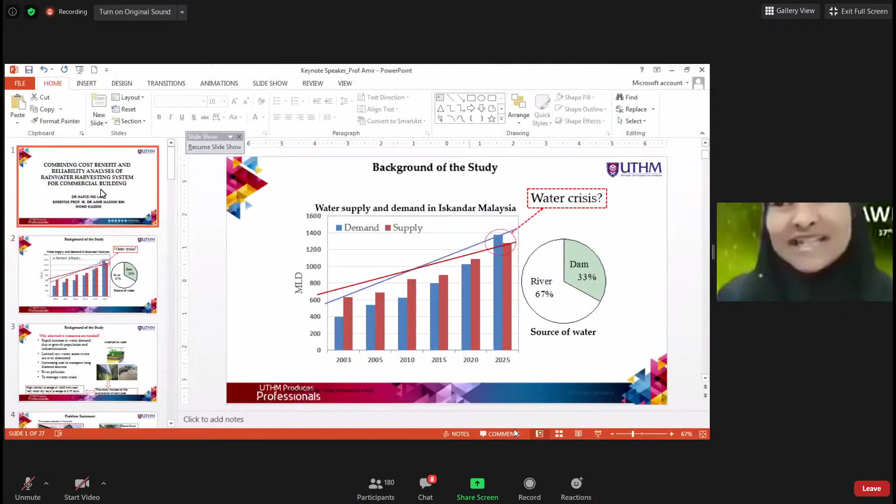Members of the seminar, I would like to bring your attention to our final speaker, coming all the way down from Johor, Malaysia, introducing Professor Insinyur Dr. Amir Hashim Muhammad Kassim from Universiti Tun Hussein Onn Malaysia. Professor Insinyur Dr. Amir Hashim worked as a professor at Universiti Tun Hussein Onn Malaysia, Department of Water and Environmental Engineering. He earned his PhD in hydrology and water resources from the University of Birmingham, and his Master of Science in Hydrology and Water Resources from Colorado State University.

Professor Insinyur Dr. Amir's research interests are in flood control, rainfall runoff modeling, and also grey water quantification. With that, I welcome

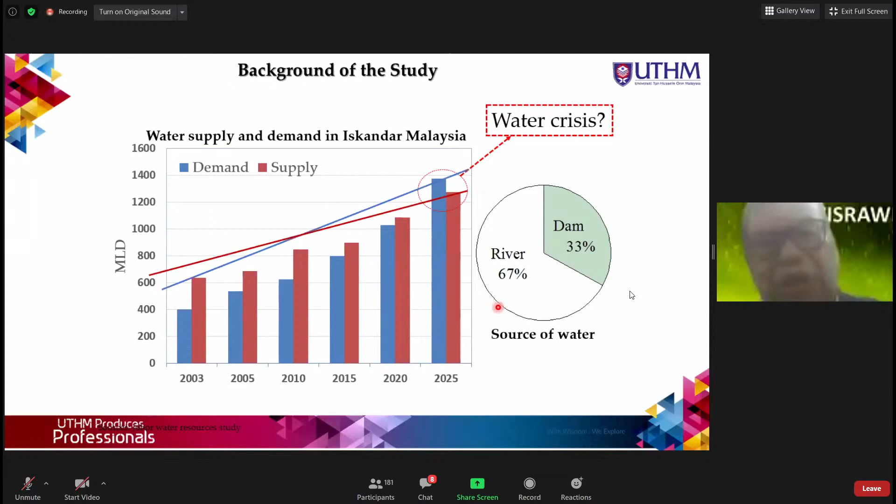Why are alternative resources required? Because of the rapid increase in water demand due to population growth and industrialization. In Johor, especially Iskandar, the population growth is quite rapid. And we have limited raw water. Some rivers are over-extracted, and there are increasing costs to transport from long-distance sources. River pollution is quite common here in Malaysia, and also we need to manage water crisis. So this study focused on exploration of rainwater. This is the alternative that we have.

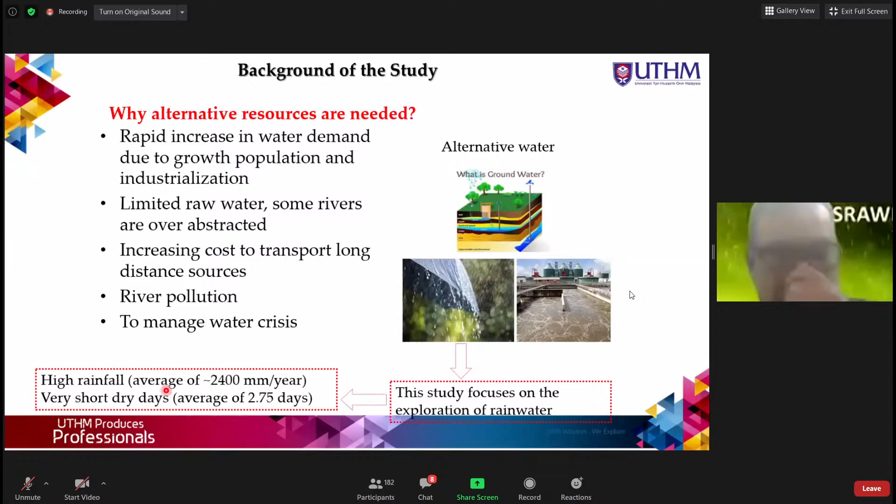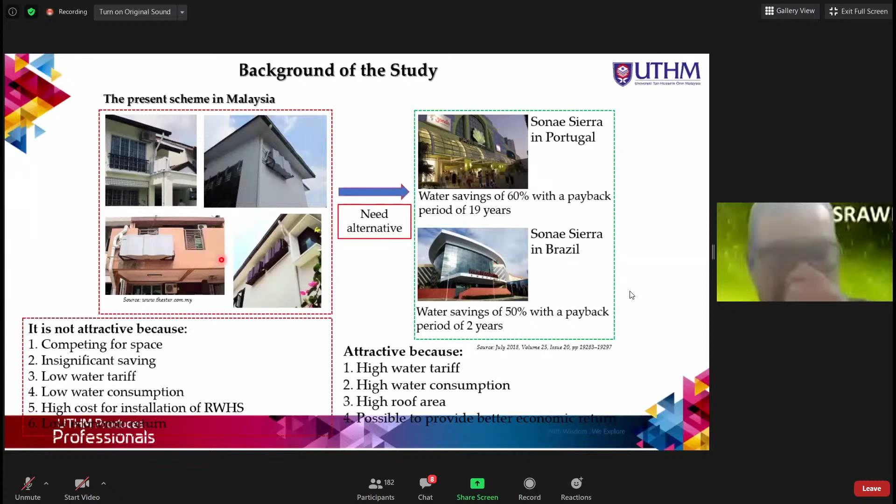We are quite fortunate to have plentiful rainfall compared to other water resources. Our rainfall is high, an average of 2,400 millimeters per year, and we have very short dry spells, about 2.75 days. In the present scheme in Malaysia, we do have rainwater harvesting, but it is not widely practiced, and it's not attractive because we are competing for space. The savings are insignificant. Our water tariff is quite low, water consumption is low, and the installation of rainwater harvesting is quite costly.

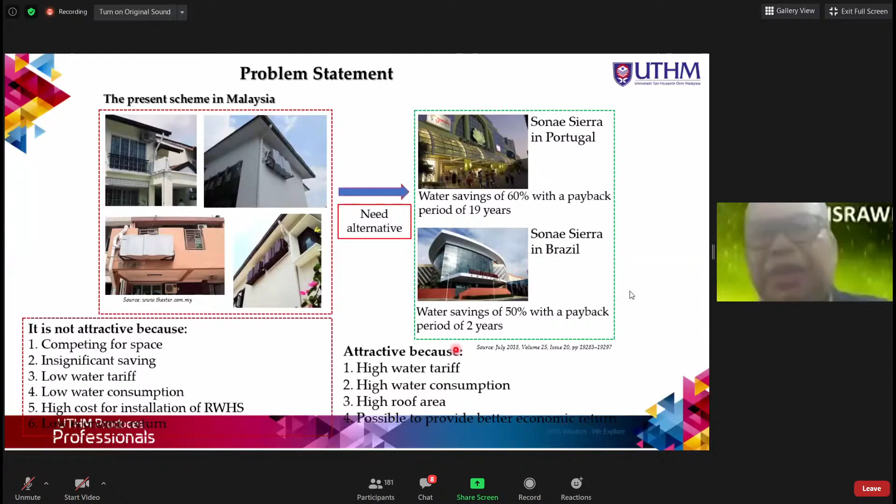But in other countries, it is quite attractive because they have high water tariffs, high water consumption, high roof area, and it is possible to provide better economic return. So with all these problem statements, the main objective is to evaluate the performance of rainwater harvesting for small and large commercial buildings by assessing its supply reliability and economic benefits. Before this we had 4 objectives, which included development of software, but in our seminar today I will just mention 3 objectives.

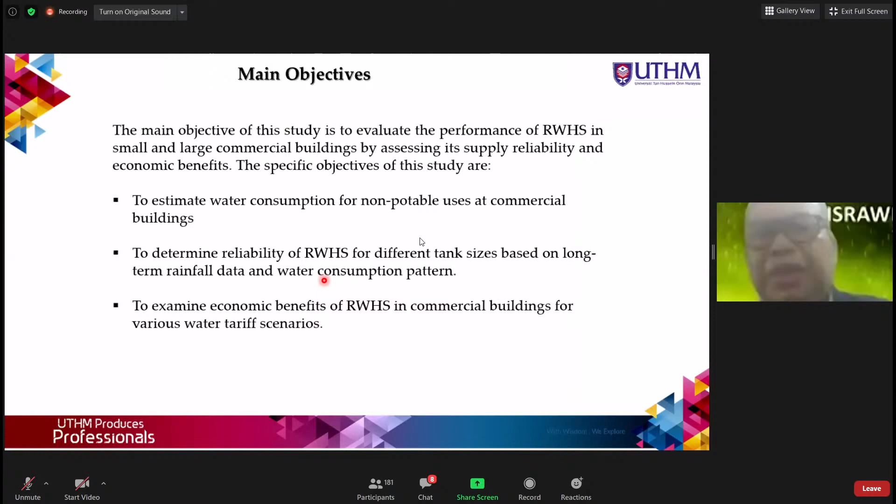Number 1 is to estimate water consumption for non-potable uses at commercial buildings. Number 2, to determine reliability of rainwater harvesting systems for different tank sizes based on long-term rainfall data and water consumption pattern, and to examine economic benefits of rainwater harvesting in commercial buildings for various water tariff scenarios.

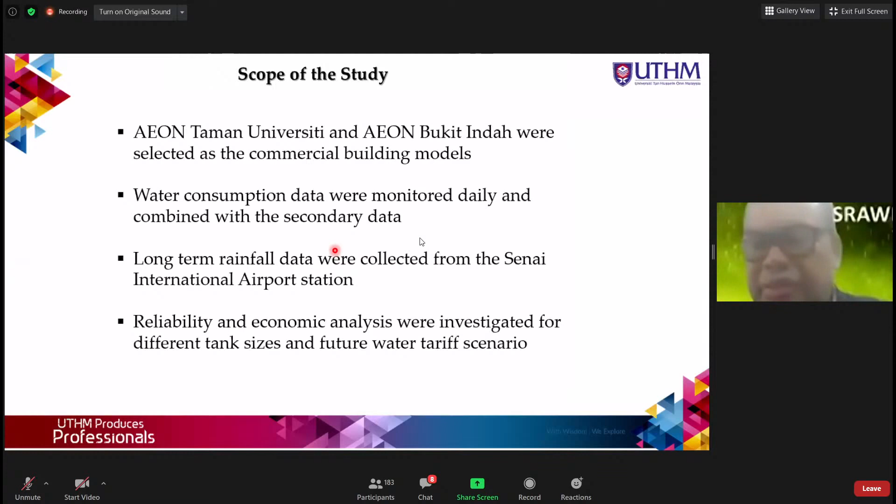Two buildings in Johor Bahru, Taman Universiti AEON, which we consider a small building, and AEON Bukit Indah, which we assume as a big building, are selected as the commercial building models. Water consumption data were monitored daily and combined with secondary data, and we obtained long-term rainfall data from the Senai International Airport station. Reliability and economic analysis were investigated for different tank sizes and future water tariff scenarios.

Through the literature review, the benefit of rainwater harvesting systems in Australia in terms of economy is annual domestic cost saving of up to AUD 240 per year per house. For the environment, in South Korea, rainwater harvesting is predicted to reduce floods by 10%. It is true that rainwater harvesting can reduce especially flash floods in urban areas like Johor Bahru. And in Uganda, it improves household water management in rural areas and reduces water-related health risks.

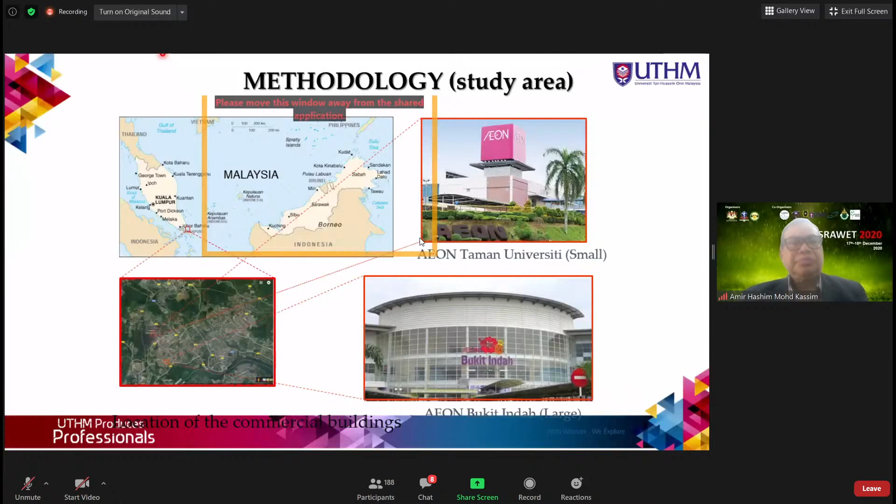There are 2 locations, one in Taman Universiti, which we consider as a small building, and Bukit Indah, which is a large building in this case. The area for the small building is 16,506 square meters, and for the larger building, Bukit Indah, it is 95,760 square meters. For each building, we have identified the collecting tank, distribution tank, and the piping system.

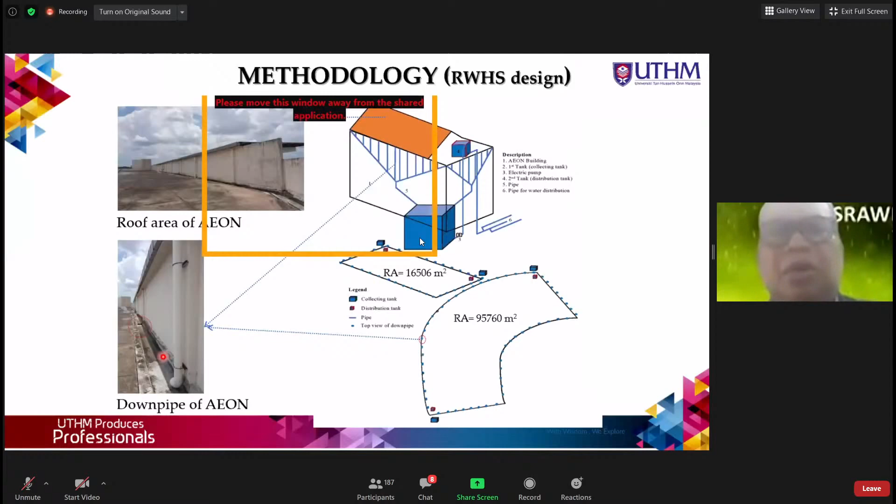This is the flow chart of what we have done from the start. We used to find the water consumption pattern, daily water consumption, monthly water bill, and we calculate the reliability analysis using the mass balance model. From the Senai International Airport, we obtain the daily rainfall data, which also includes the roof area.

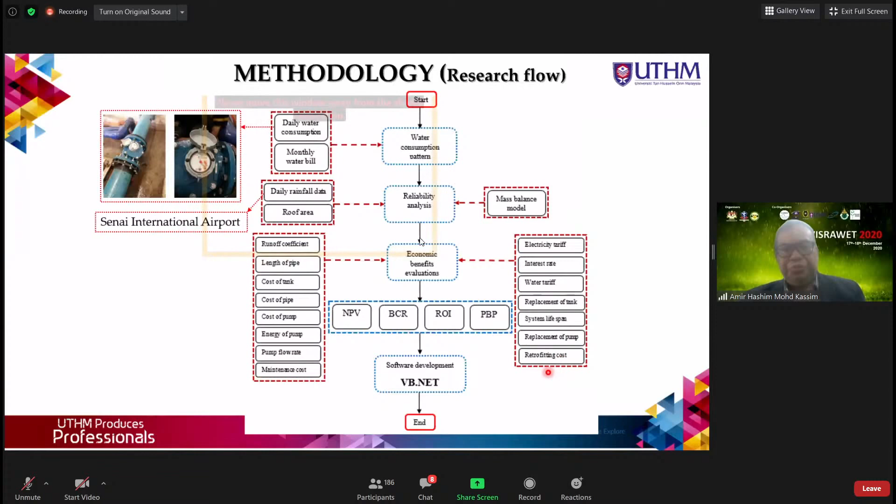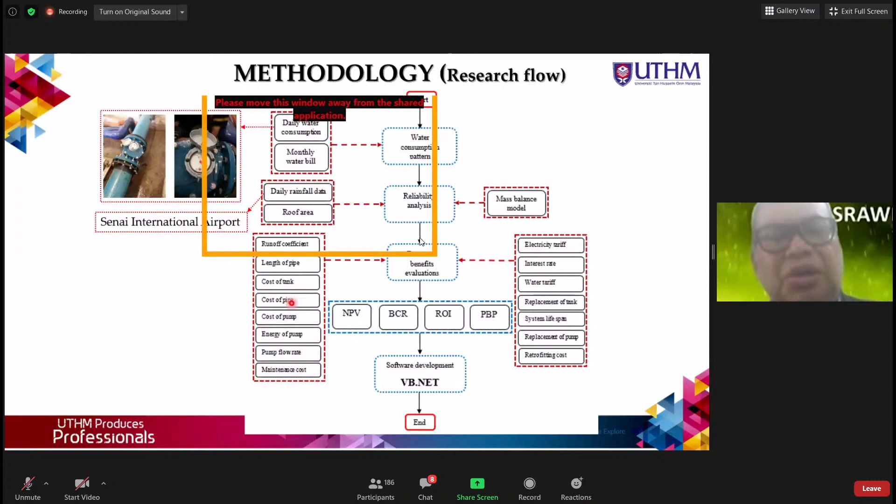The cost benefit evaluation includes the electricity tariff, interest rate, water tariff, replacement of tank, system lifespan, replacement of pump, and retrofitting costs. And from there, we get the net present value, benefit cost, the return on investment, and the payback. These are physically what we got from the reticulation system, the costing of tank, pipe, pump, and so forth.

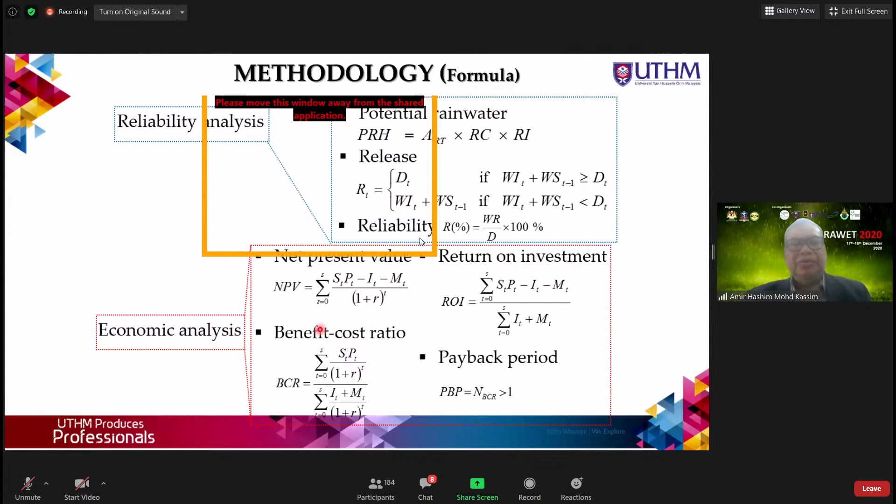This is a simple calculation to get the reliability analysis and also the economic analysis to calculate the net present value, benefit cost ratio, payback period, and return on investment. So the analysis will be based on these 4 parameters.

So what we have obtained from the research: for the large building, the length of the proposed pipe system is about 890 meters, and it's shorter in the small building, which is 446 meters. The average daily water consumption in the large building, since it has a bigger population, is 535.7 cubic meters compared to the small building, which is 213.9 cubic meters.

These are the other details that we got from the buildings. For the commercial buildings, small and large, the tank size parameter is 200 to 2,000 cubic meters. The tank size for the large building is 500 to 6,000 cubic meters.

At present, the water tariff is 3 ringgit per cubic meter. We estimate that in 10 years the water tariff will be increased to 4 ringgit per cubic meter, and in 20 years it will increase further to 4.7 ringgit per cubic meter. We are quite fortunate that the government has already decided not to increase the water tariff this year.

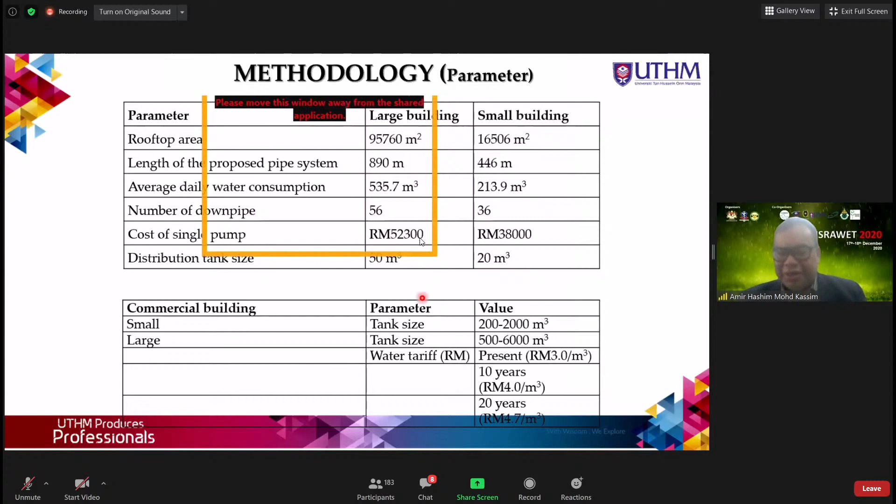These are some other parameters that we use. The runoff coefficient is 0.9, with reference from Waterfall 2004. Cost of tank is 50 cents per liter. Cost of pipe, 24 ringgit 10 cents per meter. We obtained this reference from the Ministry of Works 2015. The maintenance cost, we estimate 133 ringgit per month. Retrofitting, 4,000 ringgit per pipe.

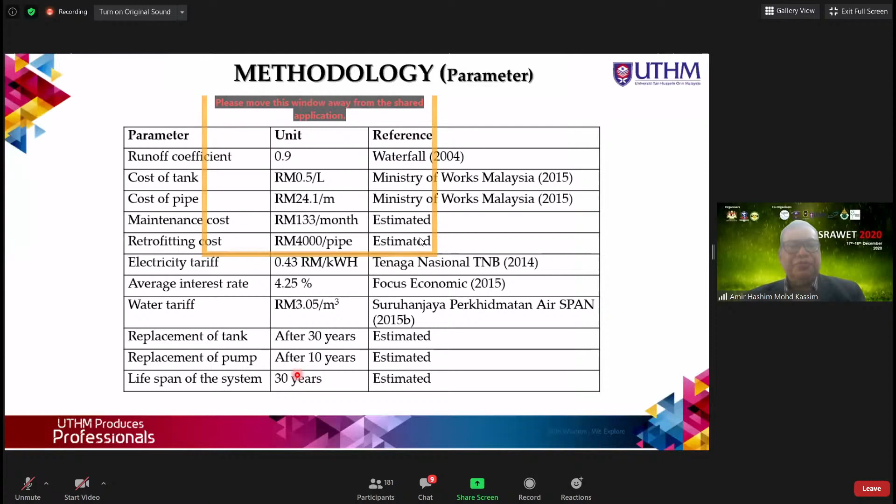The electricity tariff is from TNB, which we still use from the year 2014. In the years onwards, the value may increase. The water tariff right now under Suruhanjaya Perkhidmatan Air is 3.05 per cubic meter. We estimate that the tank will be replaced after 30 years, the pump after 10 years, and the lifespan of the system hopefully can stand for 30 years.

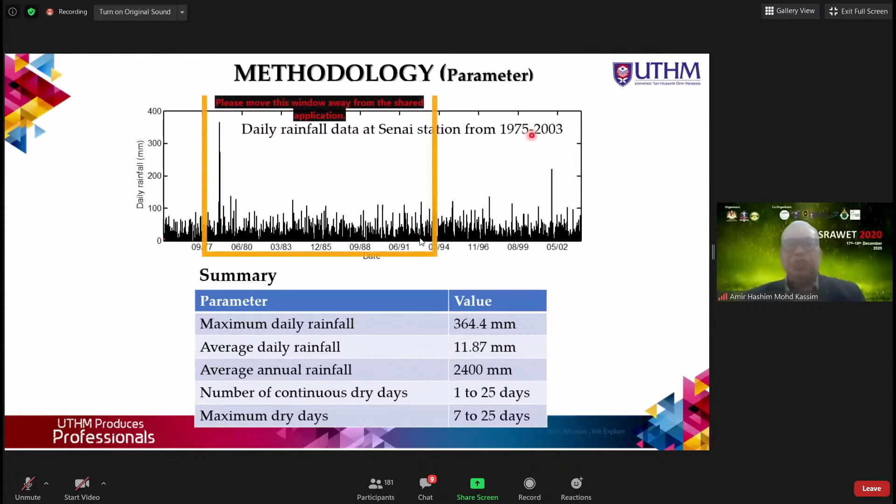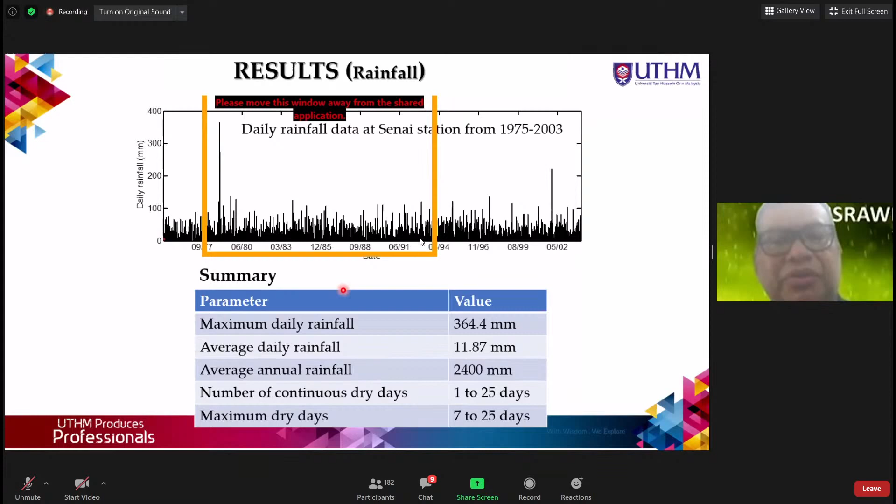This is an outlook of the rainfall data at Senai Station from 1975 to 2003. There is a large fluctuation of rainfall, and we can summarize that the maximum daily rainfall is 364.4 millimeters, and the average daily rainfall is 11.87 millimeters. Average annual rainfall is 2,400 millimeters, which is quite high. In Johor, we receive quite abundant water, and we are very blessed with the water we obtain almost throughout the year.

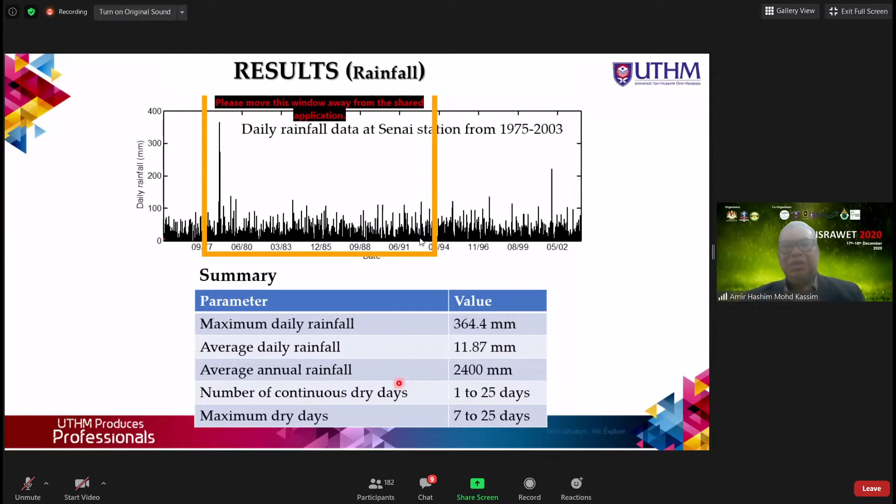These are the graphs for the small building and large building. This is how the monthly water consumption pattern for toilet use looks: almost monotonous. Plant watering, landscaping, and the chiller system, aircon, we can consider quite straight. There is no large fluctuation. For the large building, it's even more consistent, but with higher water consumption, almost 8,000 compared to the small building, which is about 2,000 cubic meters.

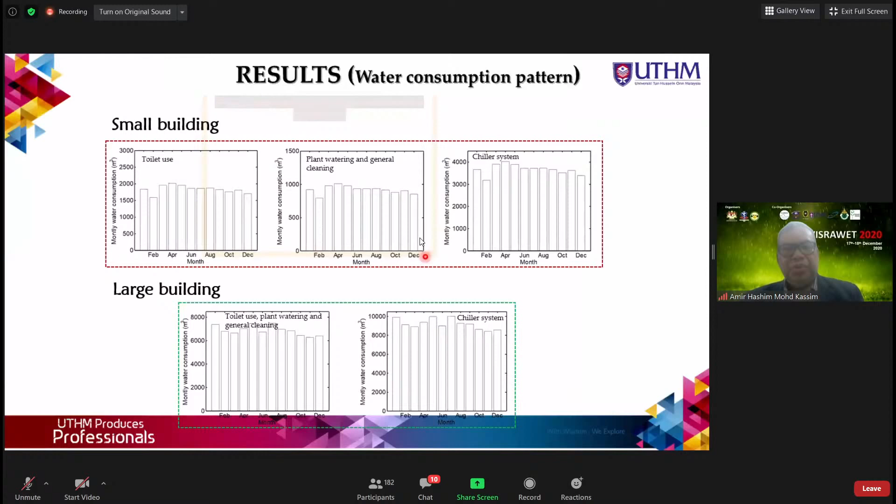And the consumption for aircon for the large building is obviously bigger compared to the small building. They use almost 10,000 cubic meters compared to the small building, which is 4,000. This is the percentage of reliability, which is up to 100% for the big building, and for the small building is just 93%.

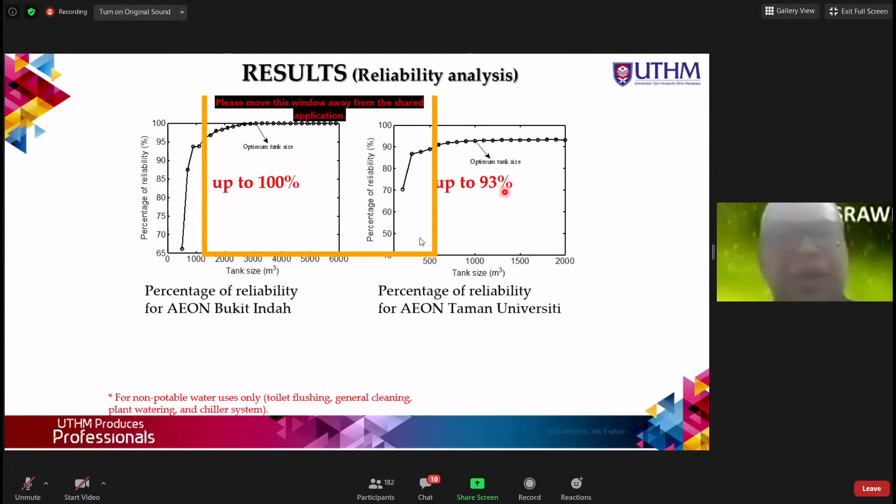In comparison with previous studies, a tank size range of 10 to 220 for livestock water use, referring to Londra 2017, is 100% reliable. For lawn irrigation and toilet flushing, 1 to 1,000 cubic meters, the maximum reliability is 35%. But in our present study, with larger tank size for the bigger building, 500 to 6,000, used for non-potable purposes, reliability is 100%.

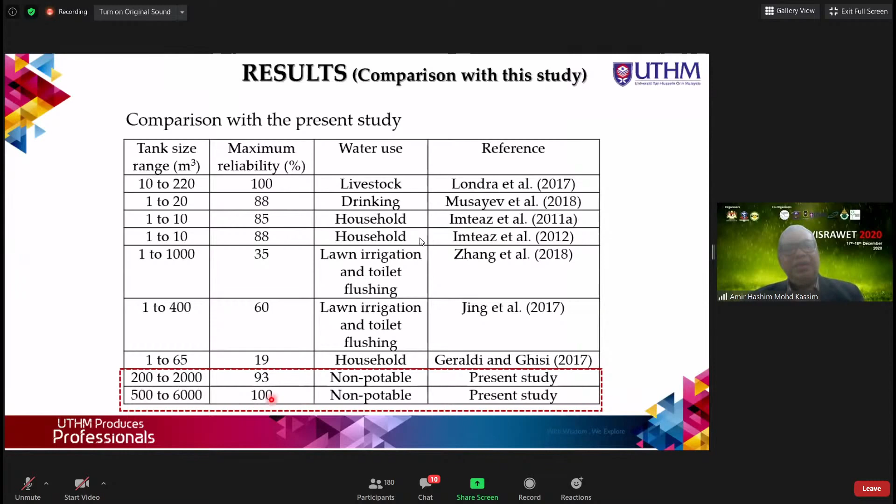This is the water tariff trend for Johor, Malaysia, from 1965 to 2015. We can assume that it's a straight line with a coefficient of almost 0.9. So we estimate that in the next 10 years, it might be 4.0.

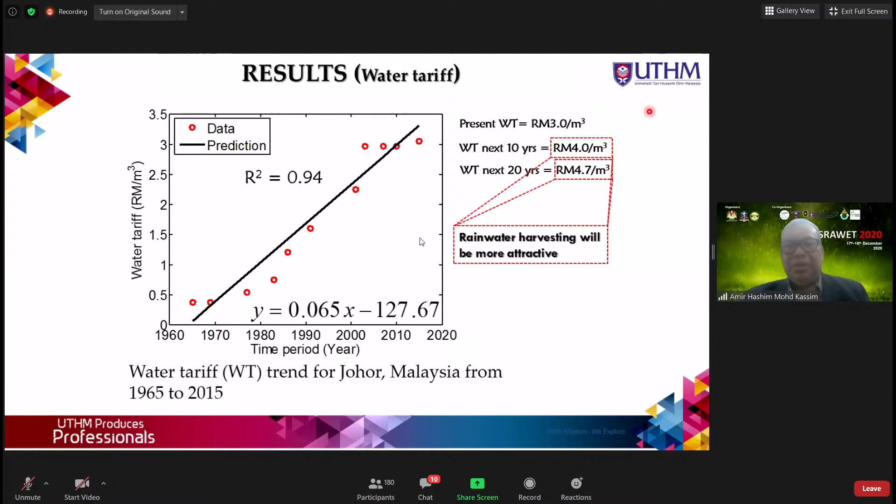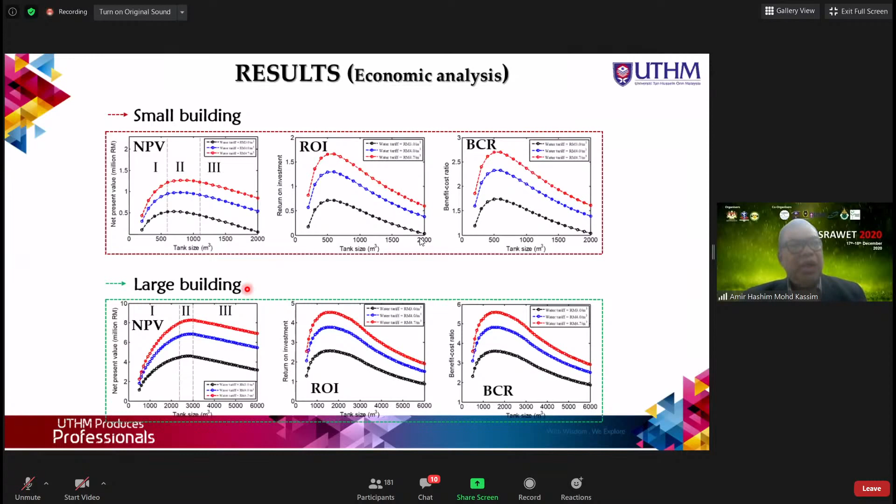And this is the calculation we use: for the small building, for this water tariff, the payback is about 10.5. If we have a bigger water tariff, it goes slightly lower, about 7.5, compared to the large building. You see that as the water tariff increases, and if you increase the tank size, the payback period only goes to a smaller year, 3 years. Meaning to say, in 3 years' time, if you use this large building with the future water tariff, the cost will be less. We have a payback period of 3 years.

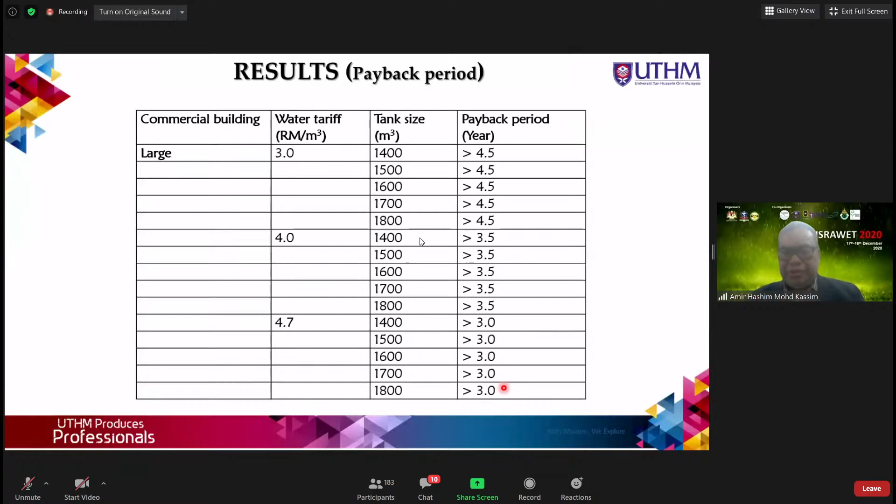So if we compare with the present study, in Malaysia the payback is 3 to 10.5 years, compared to Portugal, 19 years, Australia, 30 to 46 years. You cannot even enjoy the research you have done after 46 years. Actually, I'm old now; 46 years, I don't think I can survive.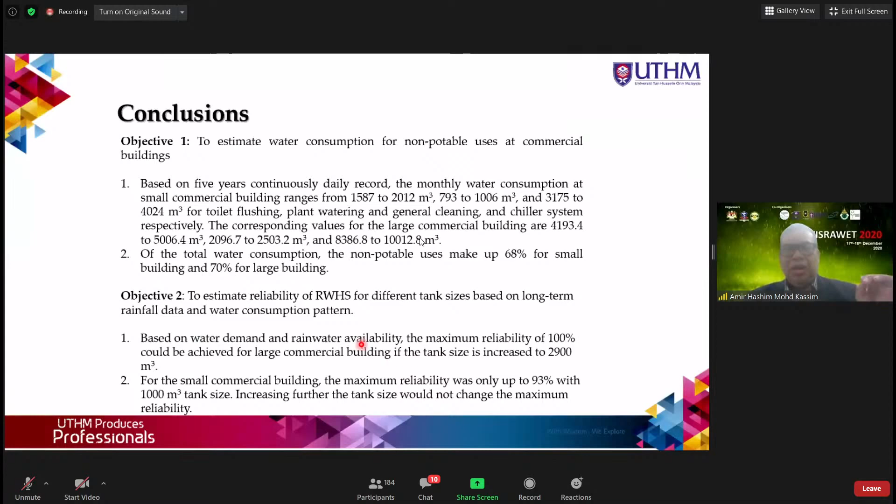Objective 2, to estimate reliability of the rainwater harvesting system for different tank sizes based on long-term rainfall data and water consumption pattern. Based on that, the maximum reliability is 100% for the large building. This is a good finding compared to the smaller one.

And finally, the third conclusion: when we examine the economic benefits of rainwater harvesting systems in commercial buildings for various water tariff scenarios, we suggest that the optimum tank sizes are 600 meter cube for the small building and 1,600 meter cube for the large building. For 3 different tariff levels, 3, 4, and 4.7 ringgit, the payback for optimum tank sizes of 400 to 800 meter cube for the small building ranges from 6.5 to 10 years. For the large building, the payback from 1,400 to 1,800 meter cube ranges from 3 to 4.5 years.

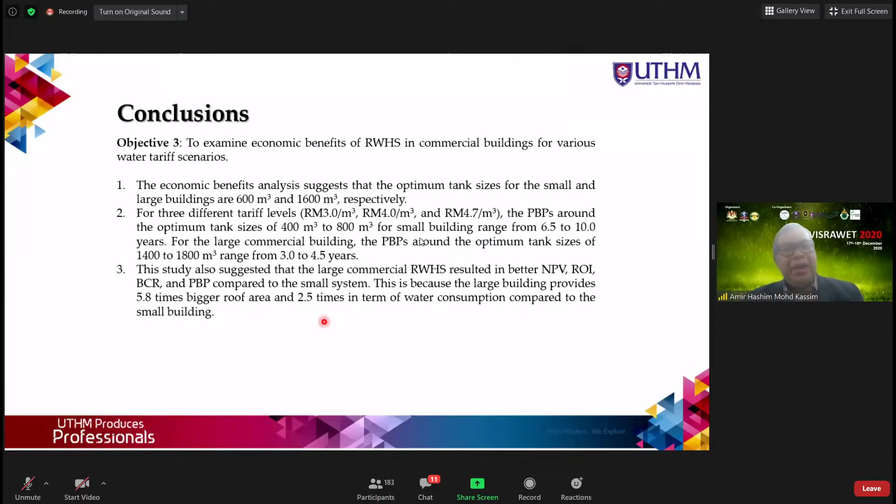So in this study, we suggest that large commercial rainwater harvesting systems resulted in better NPV, ROI, BCR, and payback compared to the small system. This is because the large building provides 5.8 times bigger roof area and 2.5 times the water consumption compared to the small building. So, contribution of knowledge: this study provides comprehensive reliability and economic studies. Technology: I haven't mentioned that we have developed a software. And for nation and society, large-scale rainwater harvesting could provide alternative options for government and building owners to complement current water supply resources.

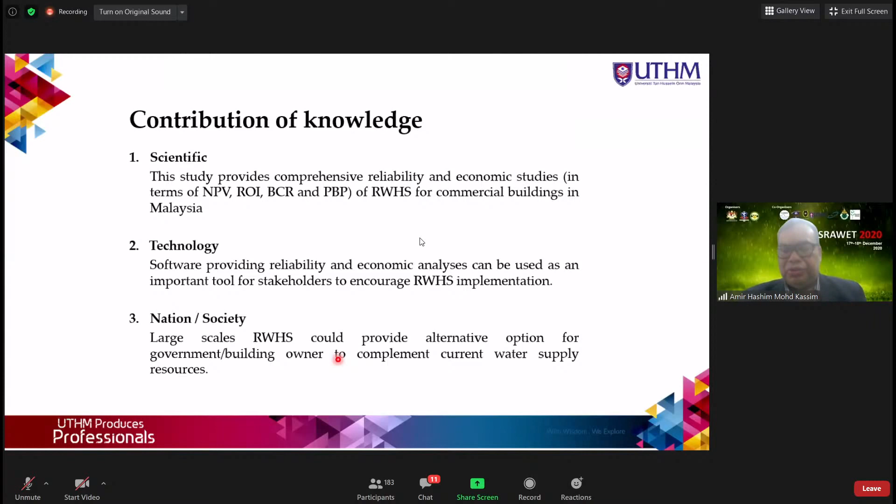Thank you, Professor Dr. Amir Hashim, for the discernment of the issue from the costing point of view in rainwater harvesting in Malaysia. May we be able to apply this in the future for larger buildings and try to cut the cost, inshallah, and earn more, inshallah.